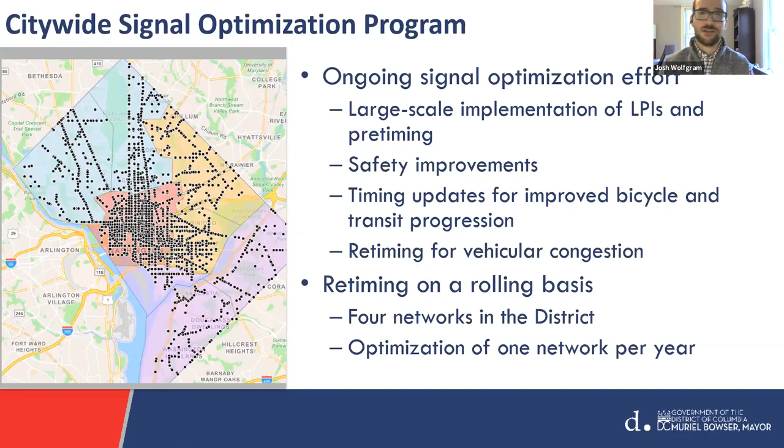Round 1, we're in the second round of the project currently. Round 1 was conducted from 2010 to 2017, the first time optimizing the signals. Round 2 began in 2018, and we're currently 3/4 of the way through that.

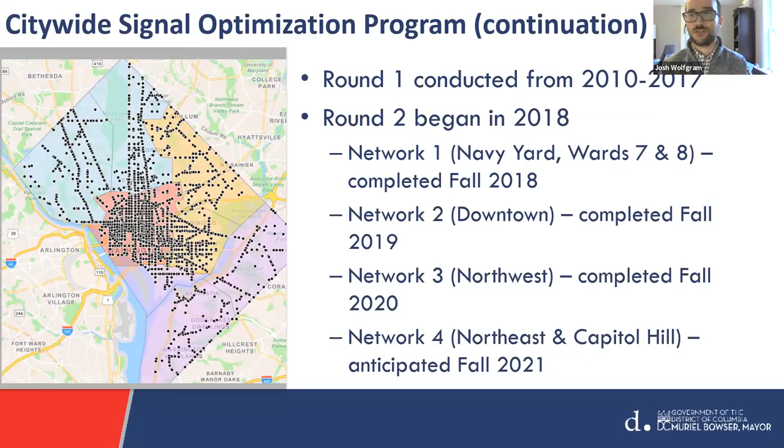Network 1 was completed in fall 2018, shown here on the bottom, Navy Yard, Wards 7 and 8. Network 2 completed in the center of the screen, fall 2019, the downtown area. Network 3, the Northwest region, completed in fall 2020. And Network 4 is what we're currently working on, Northeast and Capitol Hill, anticipated for this coming fall of 2021, shown on the right side of the screen.

I just wanted to touch on a few of the enhancements we've been making. The first of these is leading pedestrian intervals. If you're not familiar, leading pedestrian intervals are a signal timing head start tool that gives the walk display to pedestrians a few seconds before the vehicles get the green indication.

I've shown that here, circling the red signals and the walk signal to show pedestrians in the crosswalk before vehicles are actually allowed into the intersection. So we provide some dedicated crossing time without any turning conflicts. Typically that's 3 to 5 seconds, but we're able to increase that and provide more crossing time at certain locations if warranted, especially near destinations frequented that are age-friendly. This is a proven tool to improve pedestrian safety and establish their right-of-way in the crosswalk, so we're really happy to be implementing these where we can.

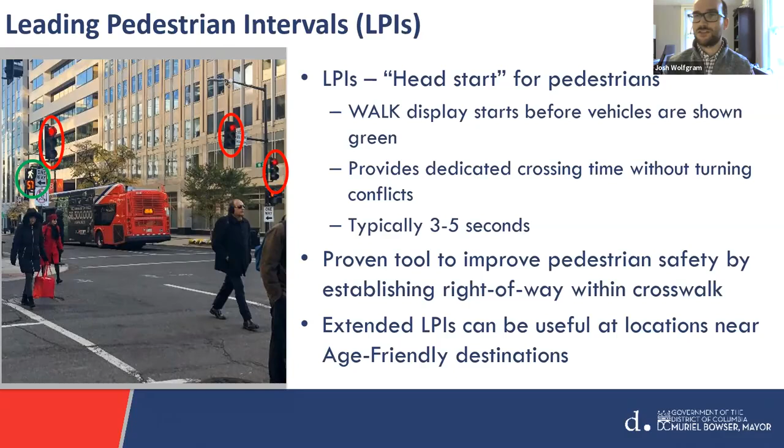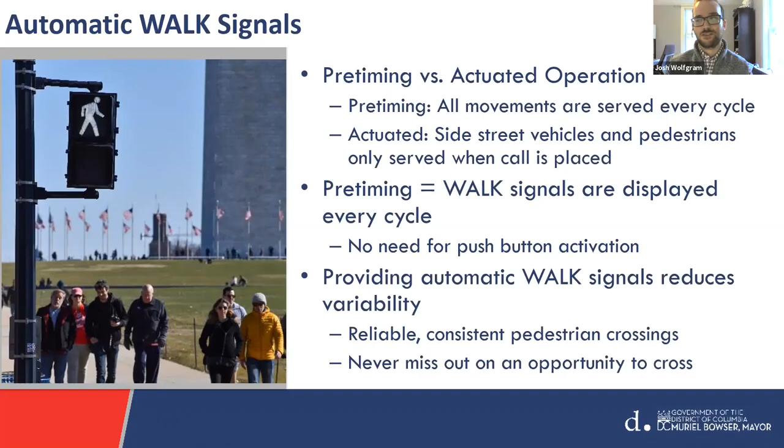The next tool is automatic walk signals. DDOT operates its traffic signals either pre-timed or actuated. Pre-timed, the signal serves every movement whether someone's there or not, versus actuated, where we're only serving the side street vehicles and pedestrians if someone is actually there. The benefit under pre-timed operation is the walk signals are displayed every time—there's no need to press a button. So we're providing automatic walk signals in order to reduce the variability for pedestrians, so no one ever misses out on an opportunity to cross.

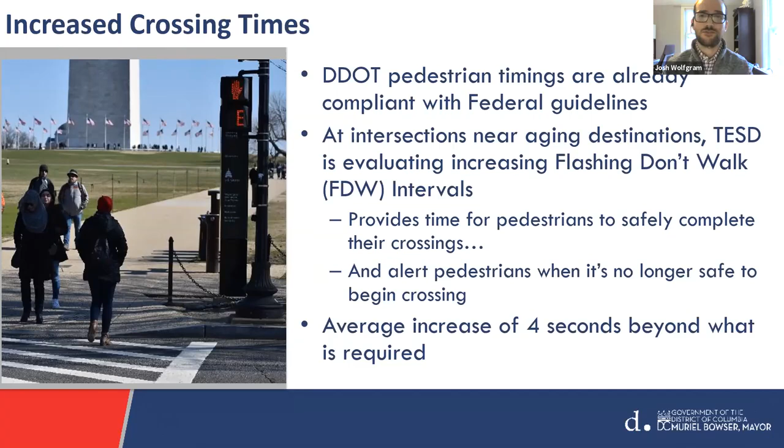The last thing I wanted to highlight today was the effort to increase crossing times where feasible. DDOT's pedestrian timings, the flashing don't walk intervals, are already all compliant with federal guidelines. However, at intersections frequented by older adults that we've identified through our age-friendly analysis, the Signals Division is evaluating increasing the flashing don't walk intervals at those locations, providing more time for pedestrians to complete their crossings and more advanced warning that it's no longer safe to begin crossing if you haven't already. That increase is on average about 4 seconds at these locations for each crosswalk we're doing this for.

The next thing I wanted to touch on was the progress we've made under round 2 so far, highlighting what we've done in each network. This is just a snippet—we've done a lot more, but these are some of the high-level things. 93 LPIs in Network 1 implemented in November 2018, along with 38 new locations with automatic walk signals, and we implemented signal sequence improvements to improve vehicular and pedestrian safety at 14 locations.

In Network 2 in 2019, 270 new LPIs were implemented in addition to the LPIs already present at all of these, as well as 29 new locations with automatic walk signals. We also retimed select corridors for bicycle progression where feasible.

In Network 3, we just implemented over 200 new LPIs this past fall, as well as converted 58 new locations to automatic walk signals. This was the first time we did our proactive network-wide evaluation of age-friendly locations, and through that we increased flashing don't walk intervals at 97 different locations.

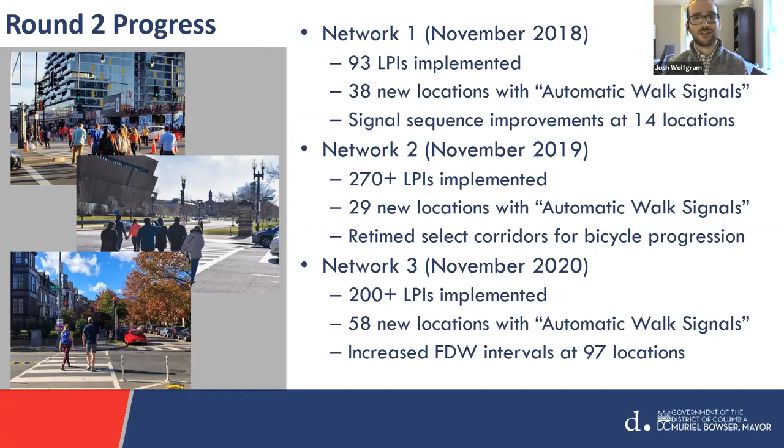Our plan for the fall is to continue this work in Northeast and Capitol Hill, continuing to evaluate and implement LPIs and automatic walk signals. The other big thing is our second effort to proactively identify age-friendly locations and implement extended crossing times as well. We're also looking to continue implementing other multimodal signal timing, operational and sequencing improvements, including more bicycle progression, transit running times, etc. That's all coming this fall, 2021.

I'm gonna initiate the slide show. Let me know. Great, and Caesar, let me know when you'd like to start. Oh, whenever you're ready, sir. All right, thank you, thank you.

Thank you all for having us here today to give you a little briefing on the Connecticut Avenue Reversible Lane Operations and Safety Study. I'm the project manager, Ed Stoloff, and Cynthia Lynn is here as the deputy project manager for this project at DDOT.

So let's go on to the next slide. Here we go, go ahead. I apologize, here we go. There we are. All right, we're going to give you a brief project overview, and then Cynthia is going to talk about the alternatives under consideration. So next slide.

We started the project about a little over a year ago, back basically in December 2019, and we did some data collection and analysis. Basically in the summer of 2020, we developed a series of alternatives for the project.

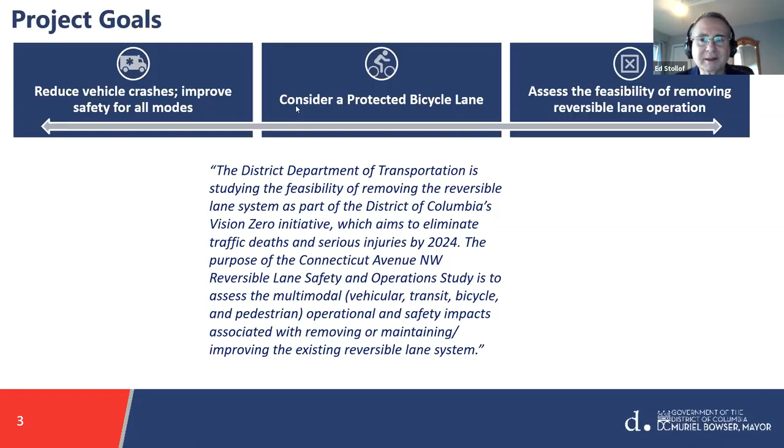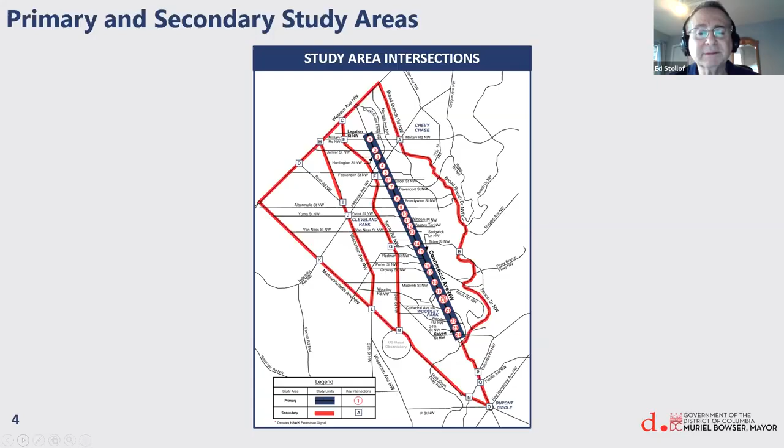Just to give you a little background, there was a study probably 17 or 18 years ago: the 2003 Connecticut Avenue Cleveland Park Traffic Operations Study, and they recommended some improvements to the reversible lanes at that time. Our Move DC update, our 2021 update for Move DC, identifies Connecticut Avenue as a bike priority corridor.

There was a Cleveland Park bicycle analysis in 2016. And then in 2018, there were 3 ANCs that provided DDOT with resolutions asking us to study the reversible lane system, as well as look at multimodal mobility and accessibility in the corridor. Next slide.

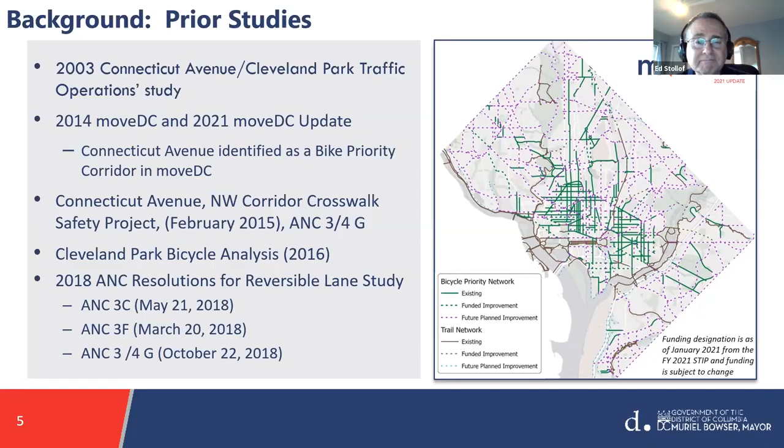We're going to talk a little bit about existing conditions. Connecticut Avenue is a principal arterial with a speed limit of 30 miles per hour. We have a curb-to-curb width of 60 feet, which includes 6 10-foot lanes today - that's one of our limiting factors, the width from curb to curb. In terms of traffic volumes today, about 24,000 vehicles per day are along Connecticut Avenue at about Calvert Street, and about 32,000 cars a day right around Porter Street.

Just to let you know, during the COVID period we took some counts in December of 2020, just a couple of months ago, and we found traffic is down almost 50% along the Connecticut Avenue corridor. The corridor we're looking at is 2.7 miles in length.

As you know, the reversible lanes, when they were operational - they're not operational now during the COVID period - were 4 lanes going inbound in the morning and 2 lanes going outbound in the off-peak direction. The reverse was true in the evening, with 4 lanes going out towards Maryland and 2 lanes going inbound towards DC. Next slide.

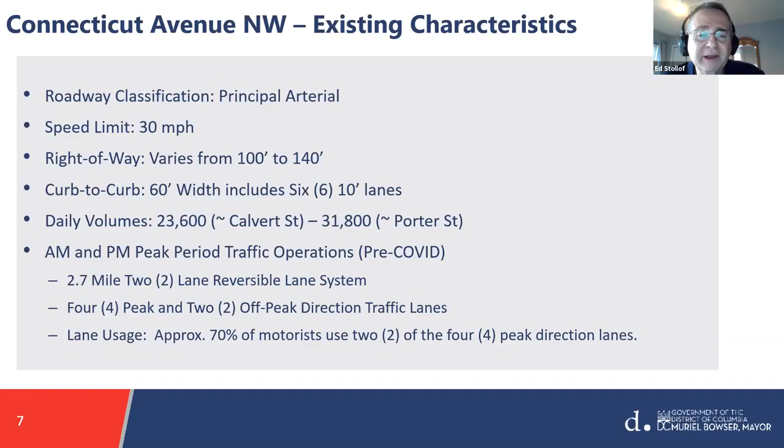We have around 609 spaces, just over 600 spaces, in the 2.7 mile corridor. About half those spaces are unregulated, meaning parking is allowed at any time of day except during AM and PM hours where it's restricted. The other half, around 300 spaces, are metered: either 2-hour time-limited spaces or time-limited paid parking. We also have about 24 loading spaces in the corridor.

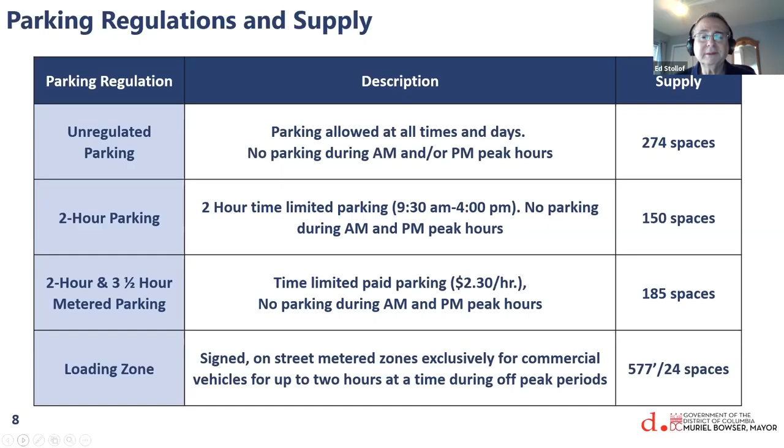In terms of pedestrians, there is a continuous network of sidewalks, crosswalks, and streetscape elements in the corridor. I wanted to identify 5 key issues the public has identified so far with respect to pedestrians. First, cyclists, scooters, and pedestrian conflicts exist on sidewalks.

There are pedestrian conflicts at bus stops. Slower walkers need more time to cross the street. There are long pedestrian wait times, and vehicles not following pedestrian laws. So those are some of the issues the public has brought up with respect to pedestrians along Connecticut Avenue.

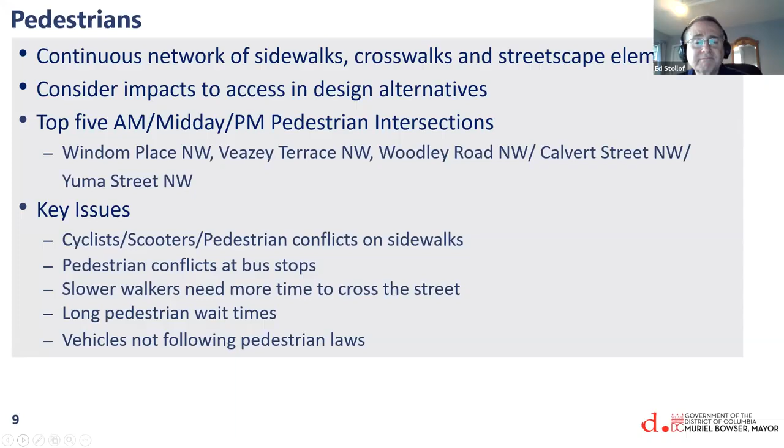In terms of bicycles, as I said earlier, Connecticut Avenue is designated as a protected bicycle facility in MoveDC. A number of years ago, DDOT did a bicycle level of stress analysis, and it ranges from fair to poor along the corridor. The intersections with the greatest bicycle volumes are between Porter Street and Calvert Street Northwest.

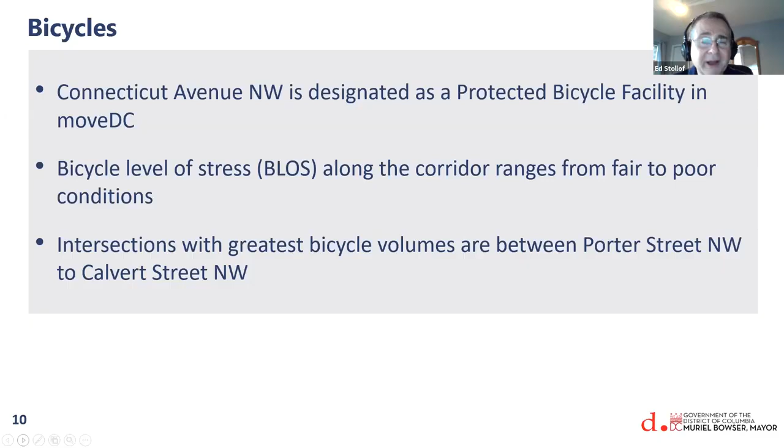In terms of transit, we have the Metro Rail Red Line, the DC Circulator, and the WMATA Metro Bus routes L1 and L2. The L1 and L2 average daily ridership combined is about 4,300 boardings. There are over 50 bus stops along the corridor on both sides of the street. During the morning peak hour, peak direction, bus headway is about every 8 minutes, and during the evening it's about every 4 to 5 minutes.

And just a little tidbit for you: Van Ness Street and Connecticut Avenue has the highest level of transit activity, with about 1,200 boardings and alightings at that intersection.

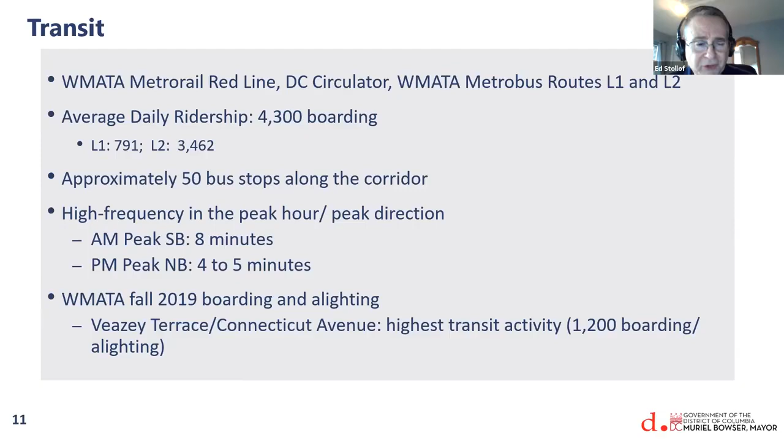In terms of safety, in the last 5 years, between 2015 and 2019, we have had over 1,500 police-reported crashes in the corridor. Over 400 of the crashes resulted in injury, and 177 occurred during reversible lane hours. 64 of the crashes involved pedestrians, 20 of those during reversible lane hours, and 39 crashes involved bicycles, 11 of those during reversible hours.

On the right side of the screen we show a heat map with bubbles colored red or yellow, where yellow means high. Right around Macomb Street, we show a very high level of crashes along the corridor. Another area of high crashes shown in this graphic is right around Chevy Chase Parkway and Harrison Street.

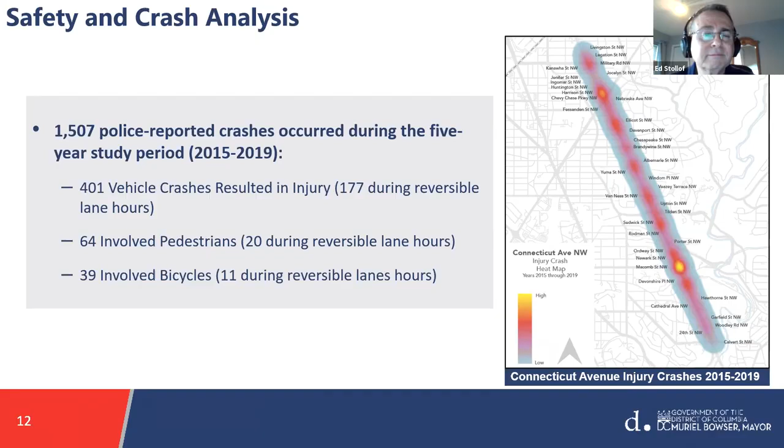So Cynthia Lynn is now going to describe the two alternatives that appear to be, as we say, rising to the top, and she'll describe the components of those alternatives.

Cynthia? Hi, everyone. Sorry, I haven't changed my Zoom background from the last time I used it—apparently there was a Christmas tree. So, thanks everyone. Next slide, please.

We're going to talk about the alternatives. As part of this, we used the guiding principles of the project developed at the beginning. We looked at criteria such as quality of life, so accommodating those who live, work, and recreate along the corridor; Vision Zero and safety, which is the impetus for this study, helping to reduce the number of crashes and fatalities; traffic operations, looking at opportunities to mitigate significant traffic impacts to the extent feasible when considering different options; and loading and parking, retaining some along the commercial areas.

We really prioritized the movement and safety of pedestrians, bicyclists, and transit users along the corridor in our alternatives analysis, looking at the 60-foot right-of-way within the curb to curb. This study's scope of work doesn't necessarily look outside of the curb-to-curb right-of-way beyond the existing roadway for all our alternatives. Next slide, please.

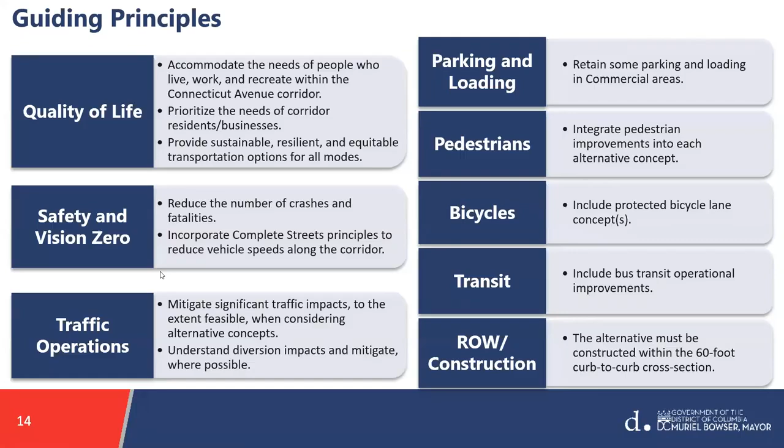So as part of our alternatives development, here are some overview items we'll quickly summarize. DDOT started with 4 build concepts: concepts A, B, C, and what we're calling D0.

We also had a no-build concept, essentially 5 concepts in total. Based on our outreach with stakeholders, we added a couple more concepts, which we're calling D1, D2, and concept E.

What we found was that for the no-build option, concept A, and concept D0, there would be a need to upgrade the overhead signals and signage, making it more apparent for roadway users where they should be on the road at peak hours when the reversible lane is in operation. However, we met with the State Historic Preservation Office, and they were not necessarily supportive of any overhead signage due to the view shed of Connecticut Avenue. So just keeping that in mind.

In terms of our alternatives, alternative B and C are rising to the top in terms of viability and have the most support so far from different stakeholders. Alternative B, which I'll go over in a moment, does remove the reversible lane, but there is no protected bike facility. Alternative C does include a one-way protected bike lane on both sides of the road and also removes the reversible lane.

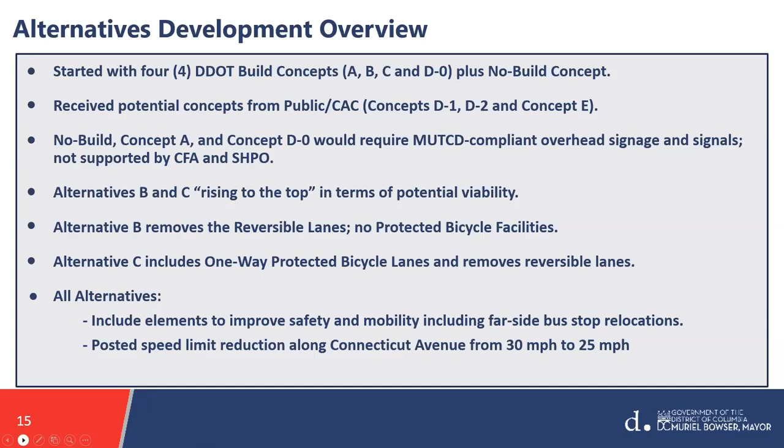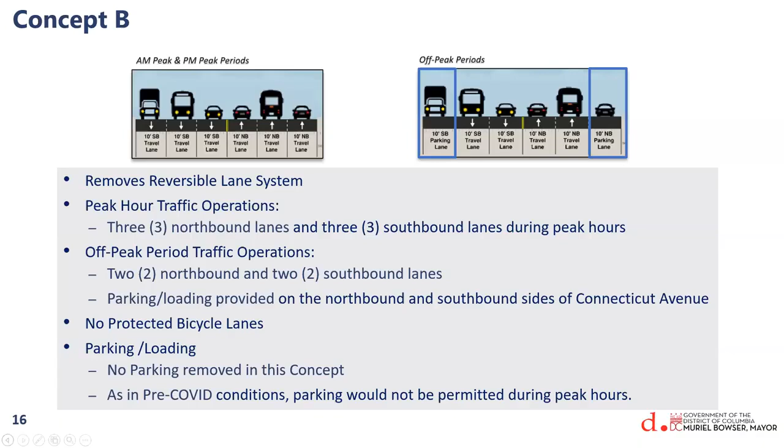So concept B, shown on this slide, has two cross sections at the top. The first shows the AM and PM peak periods where the reversible lane would be removed. During peak hours, traffic operations would be 3 northbound lanes and 3 southbound lanes. The cross section on the right shows off-peak period operation, with 2 northbound and 2 southbound vehicle travel lanes, and parking and loading on both sides of the street. This specific alternative does not include any protected bike lanes, and loading and parking would be allowed only during off-peak periods, not during peak periods, similar to pre-COVID conditions.

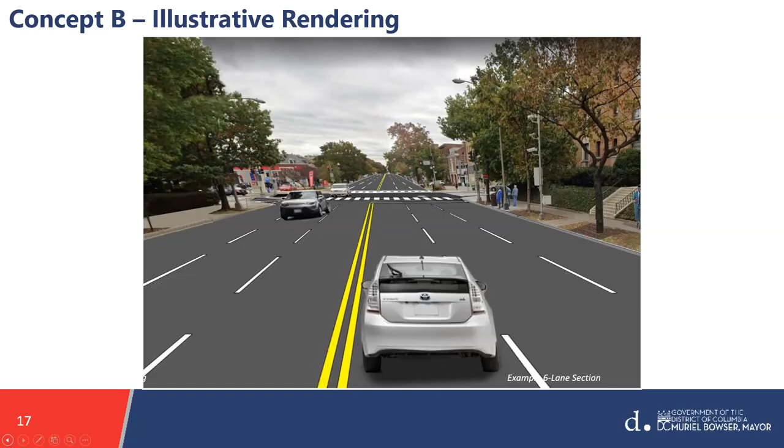Next slide please. This slide shows a rendering graphic of what the cross section for concept B would look like. It would show 3 travel lanes in each direction, northbound and southbound, during the peak period, and during the off-peak period, parking would be allowed on both sides, reducing travel lanes to 2 northbound and 2 southbound.

So this slide is concept C. There are 3 different cross sections shown at the top. The main one I'll be talking about is the fact that this concept removes the reversible lane. During all periods of the day, shown in the first cross section on the left, we show 2 northbound and 2 southbound lanes. This would be during the peak period and during off-peak periods.

There would be a protected bike lane on both the east and west side of the street, around a 4 to 5 foot bike lane with a 4-foot buffer. This also provides opportunities to have left turn pockets at specific intersections with higher volumes. The middle cross section shows an opportunity to have left turn pockets at intersections, done by reducing the travel lane widths and some of the bike lane buffers.

Another opportunity would be to have parking only within the commercial areas, located on one side of the street, and we're working with businesses to figure out the placement of the parking and loading lanes. That would be specifically within sections of the corridor, such as Van Ness, near Tenleytown, near Woodley Park, etc.

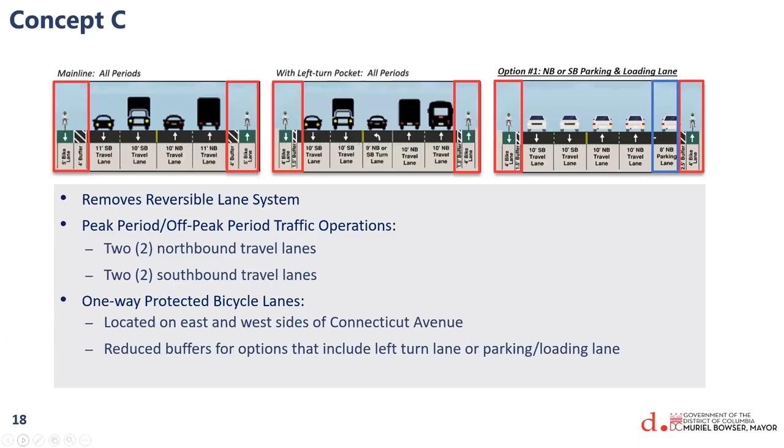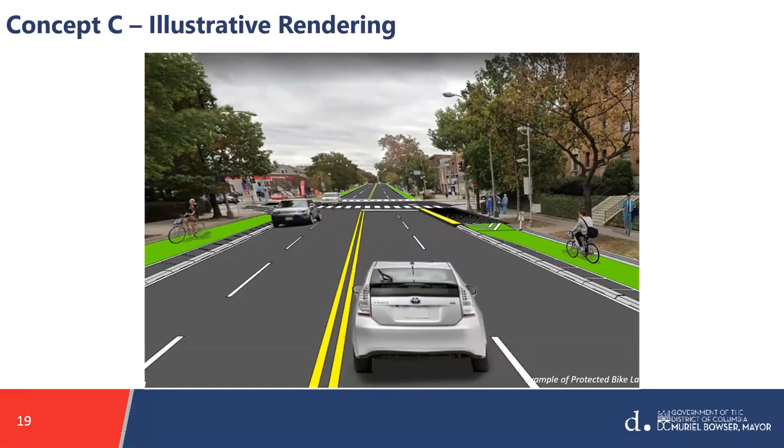So we only went through concept B and C, but there are a number of different concepts and their pros and cons that can be looked at on our website, and we can talk about it more during the Q&A if needed.

We went through an evaluation matrix and developed criteria to try to rank all of these alternatives objectively. We looked at criteria such as traffic safety and operations, bicycle, pedestrian, transit accessibility and comfort, as well as parking and loading operations, and constructability and implementation criteria. All of these criteria were developed in conjunction with prior plans with the District of Columbia, such as MoveDC, the Bicycle Master Plan, and Vision Zero, making sure they were consistent across the different plans from the past.

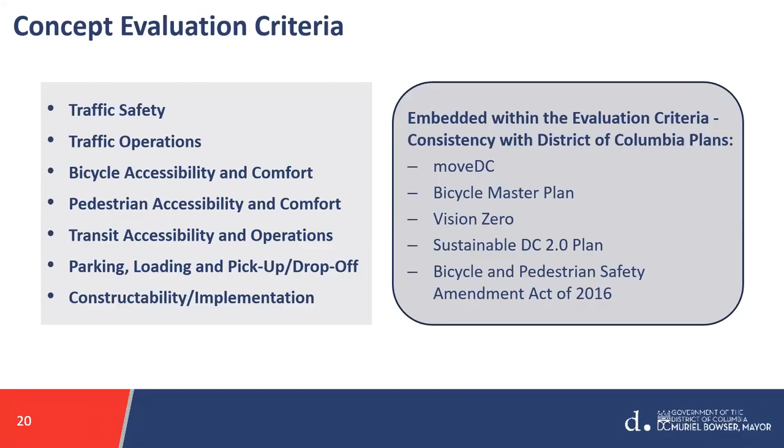In our evaluation matrix, concept B and C were the two that rose to the top, and that's why they're described in a little more detail in this slide deck. This slide specifically looks at the safety benefits of both concepts B and C.

The first one is that they both remove the reversible lane. There's an estimated 36% reduction in crashes during peak hours for both concept B and C, or around 17% reduction in crashes overall during the course of the day.

Concept C adds protected bike lanes, which helps decrease vehicular crashes and protects cyclists mid-block. Concept C also adds turn lanes at selected intersections, which helps reduce the number of crashes at potential intersections.

There is a removal of parking to provide visibility, which would help achieve an estimated reduction of around 20% of crashes. This is based on DDOT standards, and it would be done throughout the corridor as part of both B and C concepts.

There is an opportunity to add pedestrian refuge islands—little islands across Connecticut Avenue that would allow pedestrians to walk along the crosswalk and stop mid-block or within the intersection if needed, using a refuge island to go through without additional conflicts. That would help reduce crashes by another 26%.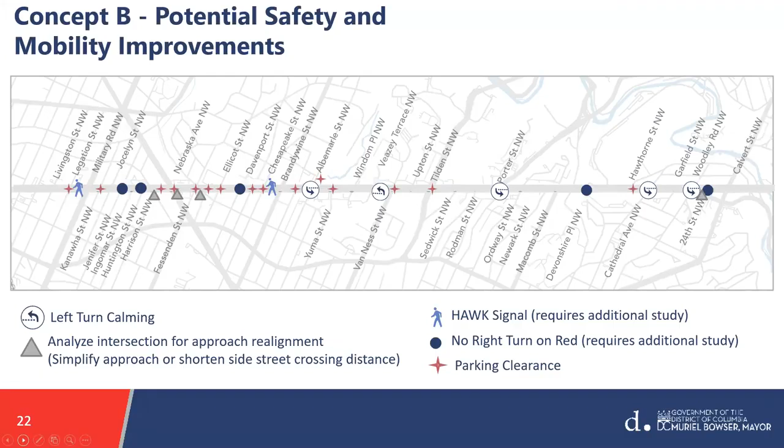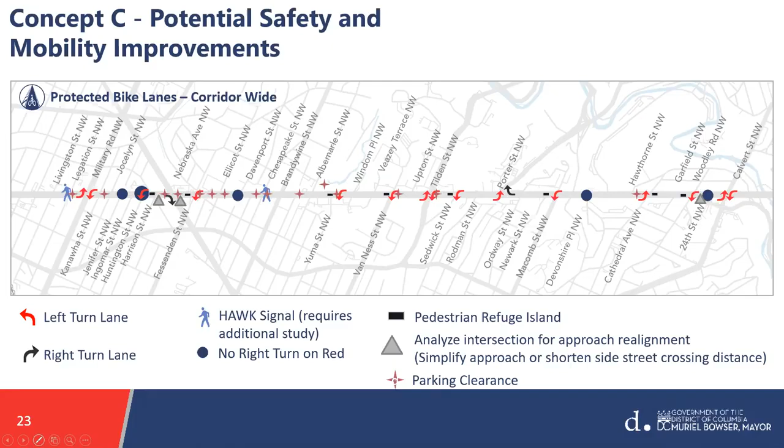As part of this project, we are not necessarily adding specific bus lanes on the corridor, but there are opportunities for operational improvements.

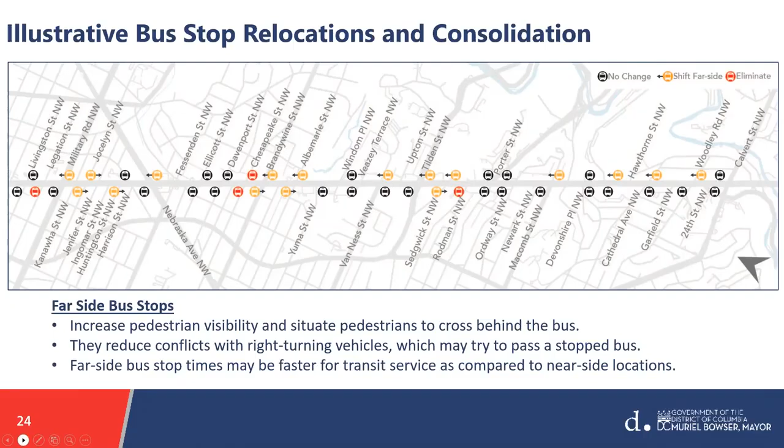This last slide shows a modal split—the percentage of people driving, taking Metro Rail, taking buses, and taking bicycles. Today, in a no-build option and even existing conditions, around 61% of the mode share is driving along the corridor. 30% are taking Metro Rail, 8% are taking WMATA buses, and around 1% are biking.

In concept B, we're projecting a very similar type of mode split because this concept only removes the reversible lane. There would be a similar amount of people probably driving, a slight shift in maybe people taking buses or metro rail, but the amount of people biking would be around the same, 1%.

But in concept C, where we are adding both a bike lane and removing the reversible lane, there is a shift in the number of people driving. It would go to around 50% instead of the 61% today. There would be an increase in both people taking metro rail and buses by around 2%. We just included that as a modal shift.

And then we did do a bicycle analysis, which showed that there would be a 10-fold increase in people biking overall. So 300 people biking today up to 3,000 potentially with concept C in the future once the bike lane is open. So these are just estimates, but they're something to consider as we move forward with a more multimodal corridor and supporting that.

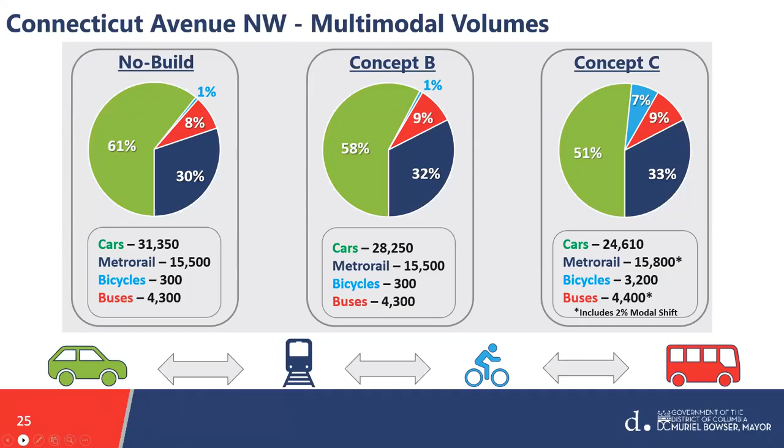And I think that's all we had. Ed, I can turn it back over to you. Sure, and thank you, Cynthia. That was great. Let's open it up to some questions.

Caesar, you can start, or others. Yes, Rob, Buddy Moore, I have a question here. What other streets in the district have the reversible lanes that you are aware of?

There's one, and that was by Georgetown, right by Canal Road. So, in that particular area, do they plan to change it, reverse it and go back to the original? Yeah, that's not part of this project. Okay, this is just Connecticut Avenue. This is Caesar to answer the question of Mr. Moore. It is a different concept on Connecticut Avenue versus Canal Road.

Okay, there's more than 2 locations. I had a map in the office that showed the only locations that we have reversible roads. I believe there's more than 2, I believe 5 or 6, a unique map, that's why I had it. It was done in the 1980s. It's 2 different cases. One of them, Canal Road, doesn't have a lot of pedestrians or bicycles. This one is just multimodal interaction all around. So I hope that answers fully.